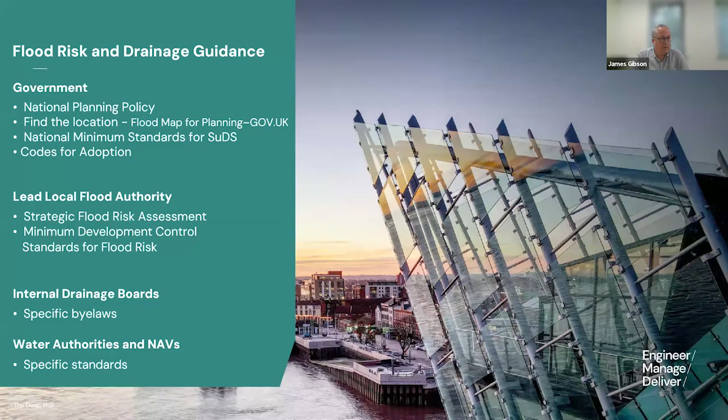We tend to apply to them for connection discussions and discharge rates. But for adoption, I'm seeing a definite swing towards NAVs. Whether that swings back towards water authorities in the future remains to be seen, but there are commercial benefits and maybe programme benefits, though overall the customer experience shouldn't change.

So, very high level assessments. On screen now are various guises of flood maps - some are old, some are new, some are available now on the government website. If you type in flood risk DEFRA, you'll get a link. You'll be asked to put in a postcode, and then you can draw around your site to get the flood risk data that's available, and there are numerous forms of this data available to anybody who types in the postcode on the website.

What governs development in flood risk terms is flood zone 1, 2 and 3. Zone 3 is split into 3A and 3B, with 3B being functional floodplain - areas designed to flood every so often, more frequently, and which really shouldn't be developed. Flood zone 1 is the lowest flood risk area, from rivers and sea, fluvial and tidal as they call it. Flood zone 1 is the area you should try to direct development towards in a sequential approach, taking the lowest risk area to develop in first.

The map in the top right-hand corner is Hull and East Riding. So when I say try to develop in flood zone 1, it would suggest Hull shouldn't be developed in, and that's not the case. There are very specific requirements for development and flood risk in Hull, but you can clearly see it follows the principle that where there's water, there's a risk.

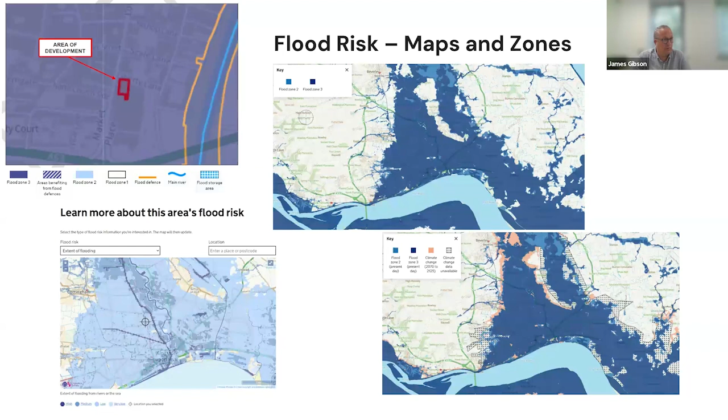Surface water flooding is that which falls out of the sky as rainfall. It's based on topography. There's a small allowance, I'm not exactly sure how it's calculated, for some drainage within the area. But if you were planning a scheme up in this northeast corner, you would try to mitigate the overland flood risk elements, either by relocating a development away from that area if you could, or by raising a finished floor or putting flood resilient measures in.

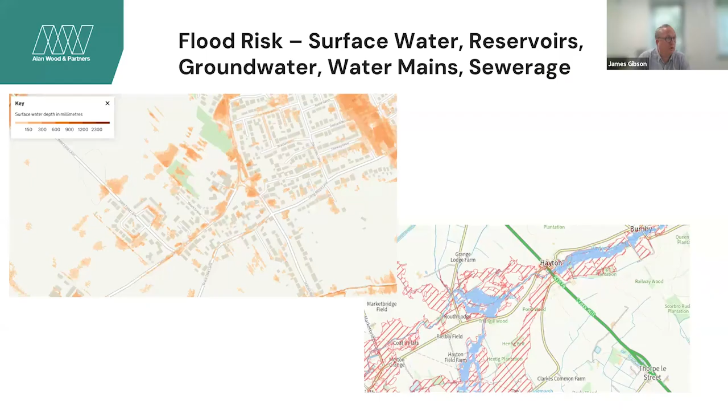This is an extract from the East Riding flood mapping service, which I think is really, really good. But you can see there are some significant depths of flooding predicted in Goole. That then governs mitigation and development in Goole. It is a low-lying area. For those who don't know, it's right next to two or three watercourses that are all at flood risk, and it's in the Humber Basin.

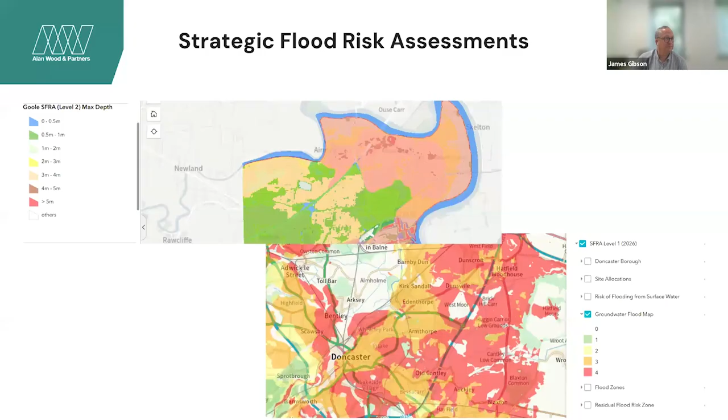So Doncaster produced their own mapping of that risk. Green is low, red is high, and that helps inform perhaps development potential, where a developer may want two stories of basement, and actually, no, that's not going to be appropriate in a particular area because groundwater flood risk is high and requires mitigation. So that's very high level site-specific information, but available to anybody to look at and interpret as they will.

As far as I know, the EA, the Environment Agency, don't publish flood level data. You have to request it. There's a variety of timescales that you get the data back from. Some sites are quick, some are less quick, but this, I think, is for York and the River Ouse.

If I can just focus on these, these are node points and watercourse. So that River Ouse has been modelled in hydraulic software. Each node has a flow associated with it at a return period, and the flood level is associated with that.

So if we've got a site in this area, we would look at the nodes opposite, we would look at the nodes in general and say, for the 2% AEP, which is the annual exceedance probability, the 1 in 50-year event, what level would that be? And we've got for that particular node 10.5 metres above ordnance datum.

If your site's at 12 metres, then clearly we're not flooding, but as that flow and flood level increases for the higher events, the 1 in 1,000 event, it's maybe up at 11.7 as it says on the table. If you're at 12, then clearly you're not at risk of flooding, and that should be reflected in the flood maps.

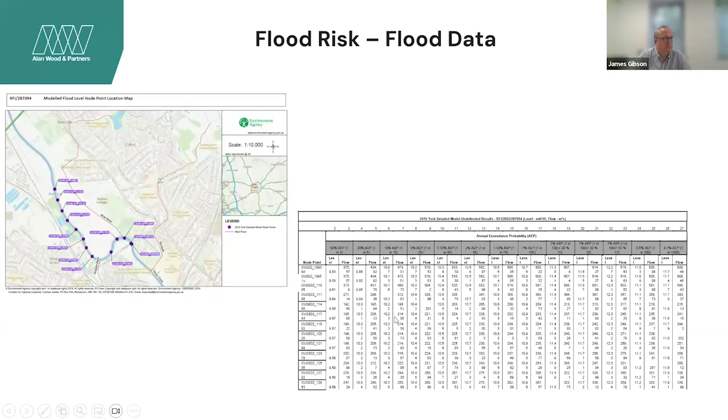Moving on to surface water drainage and drainage in general. It used to be that there were 3, expanded to 5 hierarchies of disposal. That's now been expanded in June last year with the National SuDS guidance. And in water stressed areas, which given recent weather probably most areas are, the focus is now on rainwater harvesting. Can you use that for non-potable use, irrigation primarily?

Can you use it for potable use, albeit that's more challenging than non-potable use? But we've had schemes in Hull recently that have had to consider rainwater harvesting, which we've not really considered historically.

So that's a primary requirement, and to provide good reasons why we can't do it on sites.

The image to the bottom right is a SuDS planter that doesn't recycle flow for non-potable use, but it does slow the flow down. That's a planter that has got medium within its soils and gravel, so we're getting water quality benefits. We're getting slowing the flow, and we can also reduce the volume of water discharged out into the sewer system. There'll be an overflow from that device into the ACO down there.

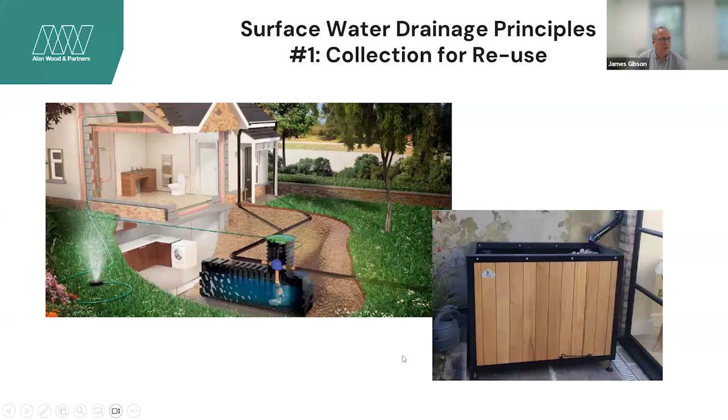So then we get back to what I think is probably well known by the audience, the infiltration drainage principles. Soakaways, historically, used to be brick-filled pits. Nowadays, they're a little bit more complex and cleaner than that, whether it's a geocellular system, a manhole, or a granular surround. Getting water to go back into the ground is more sustainable than discharging it elsewhere.

We're very much guided by BRE 365. So anybody who has a consultant keeps on getting battered by 'you need to do a BRE test', that's the reason - Building Research Establishment test number 365. It's as dull as it looks in terms of digging a hole, filling it with water and timing it. In my experience of watching a lot of these, a lot of them don't work, and I've had occasions where water levels have increased, not decreased.

So the areas that we tend to work in the north aren't great. However, we do have schemes where we have limestone ground conditions and infiltration works really, really well. This tends to be a discussion point during the LLFA meetings - do we need to do one in Hull when we tend to know the ground conditions in Hull aren't great, but there are pockets in Hull that may be appropriate. So this is the reason why we specify BRE 365 tests.

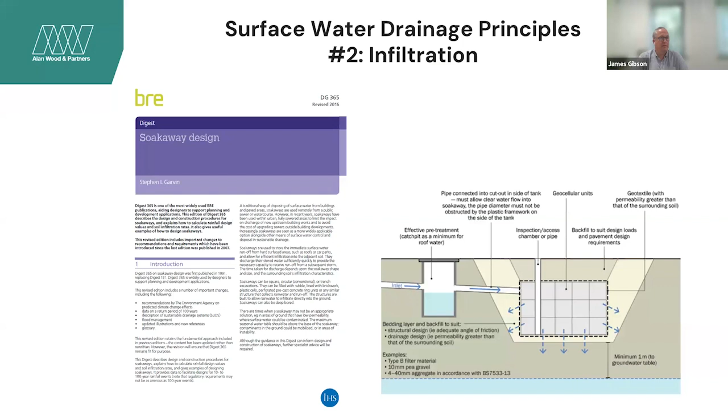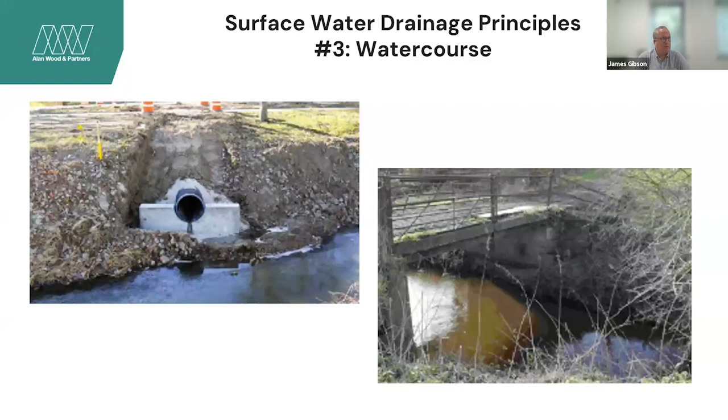In recent standards, foul water sewer discharge was accepted - that's been, I think, removed. There are issues with foul water sewers, obviously, which I'll touch on later, but the hierarchy should be to reuse it, to get it back into the ground, or to discharge it to a watercourse, and these last two, number 4 and 5, are less favoured.

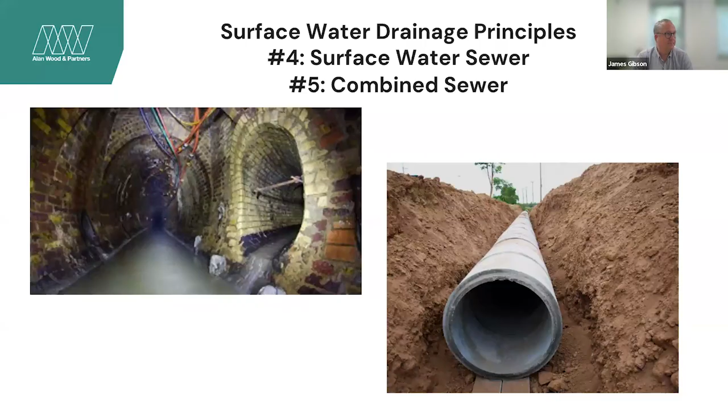So the guidance that we primarily use is the SuDS manual. It is a fairly old document now, and I understand it is being renewed. I'm sitting on a SuDS panel with CIRIA and local partners on a SuDS tool, IQ SuDS, which will develop and enable quicker assessments on the benefits of SuDS for consultees, contractors, consultants, and general public. So the SuDS manual is the element that governs our designs and outputs and informs development in general from a drainage perspective.

The other 3 elements of SuDS, the biodiversity, the amenity, and water quality, have always played second fiddle, but I think that is certainly changing now. The biodiversity certainly is being considered more hand in glove with the biodiversity net gain requirements. Amenity is at the forefront of developments and residential schemes, making it an environment people want to be walking around and interacting with. And then quality,

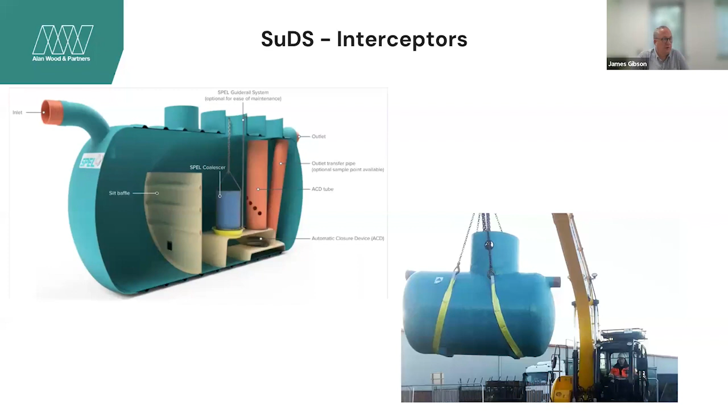These are still appropriate. There are settings in more of an industrial commercial sense that these are appropriate still. They can still provide water quality benefits. They have a finite lifetime. They need operation and maintenance, but people are used to seeing these and it's still appropriate.

However, we're more used to getting these discussion points on schemes, bioretention areas. Flow comes off the carriageway and is filtered through what is effectively a planted up area. For anybody who's been to York recently, in the York teardrop site at the back of the station, the roads run off to really some good SuDS around there.

The York Ring Road, again, there's some wildflower planting and some swales that deal with runoff from the road, and that's quite a high risk area, massive, huge traffic movements, huge amounts of vehicular movements in the day, and the risks therefore of pollution are quite high. These aren't designed to manage 100-year storms and big events. These deal with the day-to-day 1-year events that carry the highest pollution.

What you don't have a lot of is the water quantity. So you're not storing a lot of water. You might only store 2 inches, 50 mil of water in the bioretention. So it's land hungry from a developer perspective, but actually you could incorporate that with traffic calming. And it's got an overflow into the sewer system to deal with the larger events.

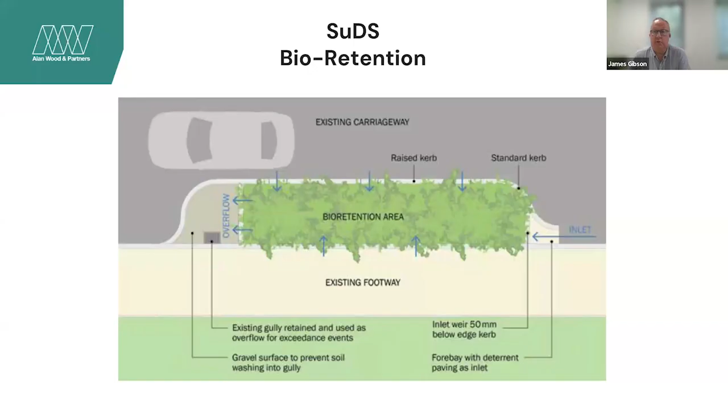Anybody who's driven down the motorway with French drainage on the side of it, this is very similar, or exactly the same, different way of saying a French drain. It's a filter trench with a granular layer that water can flow off the surface of the carriageway or the hard standing, the car park, wherever, through the granular material.

It isn't particularly nice to look at. However, you do get the water quantity benefits. There tends to be a 30% void ratio in the stone, so flows can be stored in the filter trench. They're certainly treated by the granular material. But in terms of benefiting amenity and biodiversity, it's a bit of a stretch.

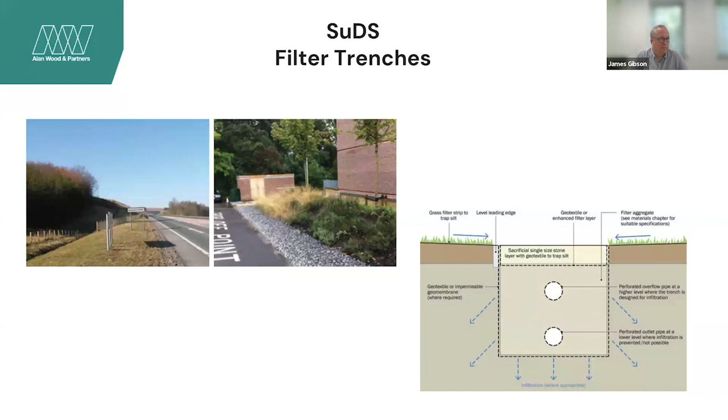But clearly that's taken away 15 meters of potential developable land. So planning developments, densities may need to be tweaked if large scale SuDS like this are required.

There's many ways to address groundwater issues, in terms of whether there's a risk of groundwater coming up through the base. We can line the swales with impermeable membranes. If the swales themselves are very shallow, we can underdrain them with perforated pipes. So swales are, I think, quite beneficial.

And in Lincolnshire, for example, these are fairly commonplace. Certainly as you head more south in the country, swales are probably more seen with highway authorities and accepted. As we move up further north, they're being encouraged, but in terms of design standards and expectations, we continue to work with local highway authorities on the adoption requirements, and again, each authority has a nuanced view of it.

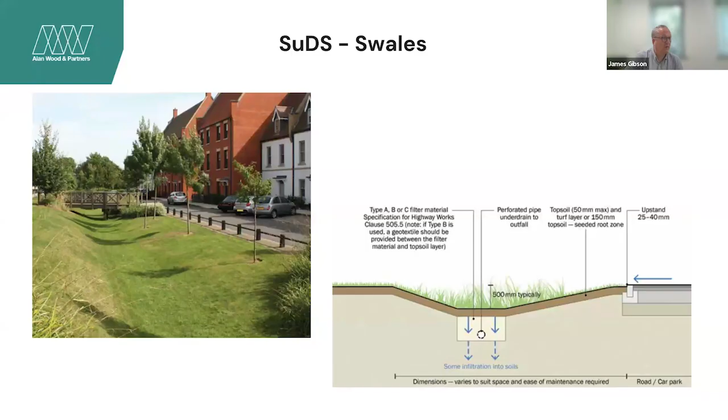We limit the flow back into the combined sewer at 2 points. So this was a flood risk reduction scheme, but with a very clear objective to try and include more green SuDS. In this case, greenery wasn't appropriate. The loss of car parking space was very, very sensitive. So to put in bioretention areas or tree pits, in the end of the day, wasn't agreed.

However, we are getting water quality benefits. We are slowing the flow. We are storing excess flows. So from a flood risk reduction perspective, this is doing the primary job.

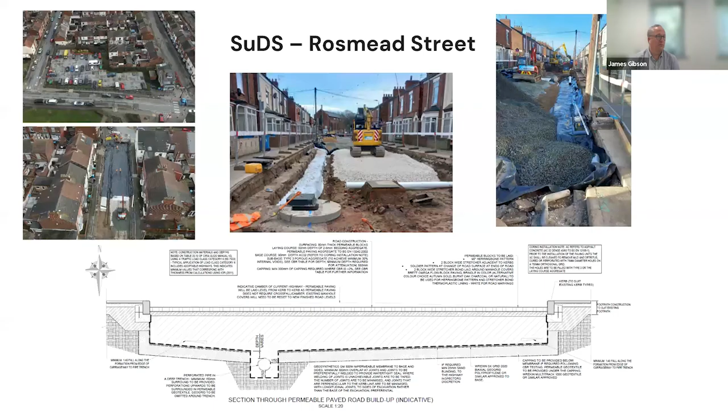Again, an involved scheme with Hull City Council and their highway teams, who were really receptive and up for the challenge - just in terms of material replacement, what do you need in the depots compared to how you used to do road construction and maintenance? But that, for me, I think is a success in terms of flood risk reduction, and it's a matter of opinion, but I think it looks a bit nicer than the tarmac.

I think people are used to seeing large attenuation basins on schemes, and they are bang for buck, very economical compared to buried storage. However, they are end of pipe solutions. Flow tends to go all the way to the basin. You get your water quality benefits if it's planted.

You get more water quality benefits if it's a pond. You get the biodiversity and amenity benefits. The more planting and more elements, you make that look less engineered. However, it may prevent adoption if you put in too much planting and amenity space. So there's a trade-off between what a water authority or a NAV may adopt compared to what the biodiversity net gain requirements are.

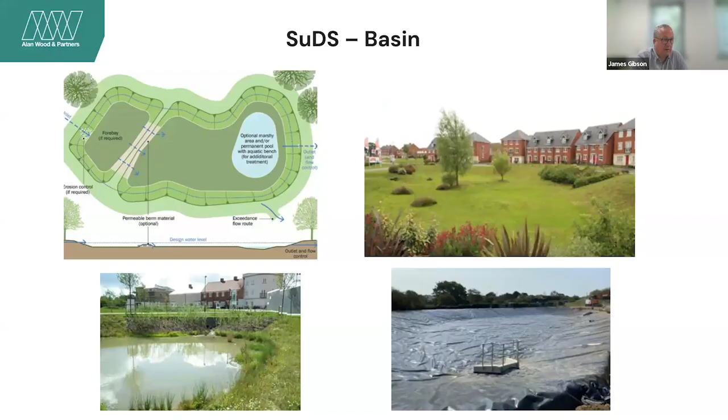And again, bottom right-hand corner, there's always methods to prevent groundwater ingress to make sure that the capacity of the basin is there. You can turn the basin into a pond and have a permanent water level in it.

Image on the right-hand side is directly from the SuDS manual. We spent an inordinate amount of time talking to specialists about gradients and depths of water for water quality benefits. However, that's got to be traded off by over-excavation and the cost of disposing of material, because the void that you create to create the pond isn't available to be storing water. So it's not a quantity benefit, it's purely a quality and amenity benefit.

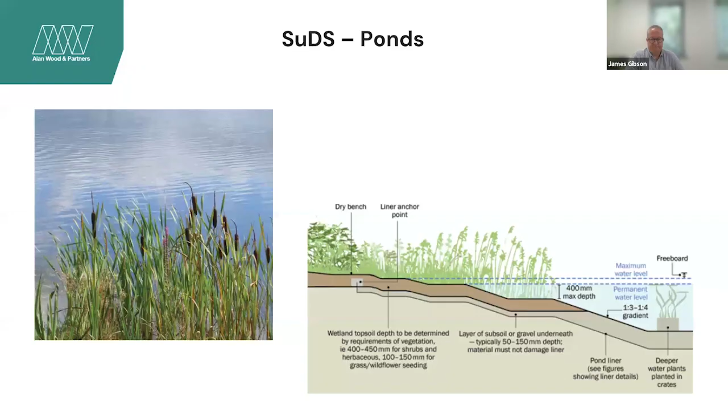Moving towards one of my last slides on surface water, the buried storage is traditional geocellular crates, the milk crate type people see, whether wrapped in a permeable membrane or not. We've got oversized pipes, precast concrete tanks. They're traditional, I like them - you know what you're getting when you put them in, and they're historically proven, certainly the concrete tanks. However, absolutely no water quality benefits - sorry, there are some, because silt can settle out, but there's no biodiversity, no amenity, and local authorities in my experience are moving away from them. However, they are still part of the SuDS schemes you can use.

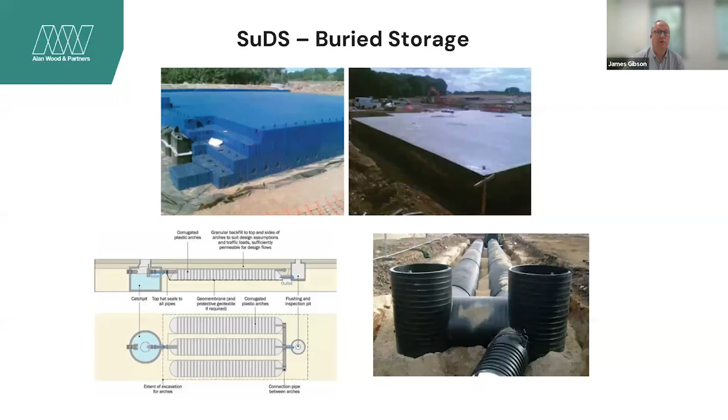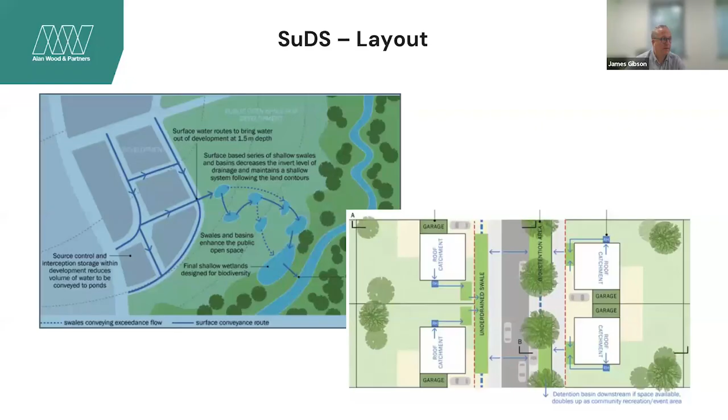Layouts, as I touched on before, SuDS tend to be more land hungry than clearly a pipe and a manhole in the road. That's just down to space use, topography, available areas, and what you can try and double up on. Permeable paving in driveways, for example, you're not increasing the space requirements but you may change the material. You can still use permeable tarmac on lightly loaded areas. So it's not all doom and gloom from a space perspective - it's just got to be appropriate to what you're trying to achieve.

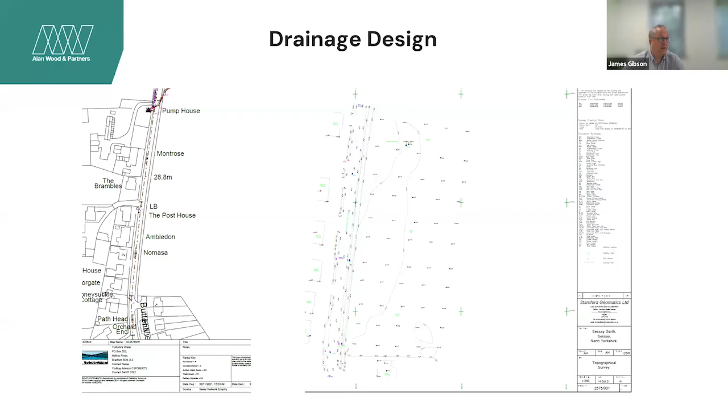I won't go into too much detail on drainage design itself, but our starting point on the right hand side is a very light touch topographic survey - where does the land fall to? Left hand side is an extract from Yorkshire Water sewer. Where can we discharge into if we can't infiltrate, if we can't connect to a water course, if we can't reuse water on site? So we take those elements, look at the ground conditions, look at the connection points, and then build up a scheme.

This is for a small house developer, where we maximised the use of permeable paving. If I'm being honest, this is a couple of years old - I don't think we made the most of SuDS planters, for example, or bioretention areas. So there are always opportunities to add more, but there's the balance between programme, cost, and developer ambition, as well as local authority requirements. In this case it was deemed appropriate that permeable paving was used to slow the flow, balance excess flow, and get the water quality benefits.

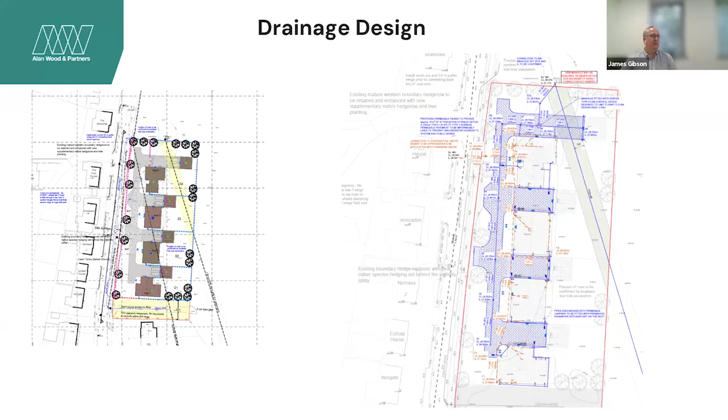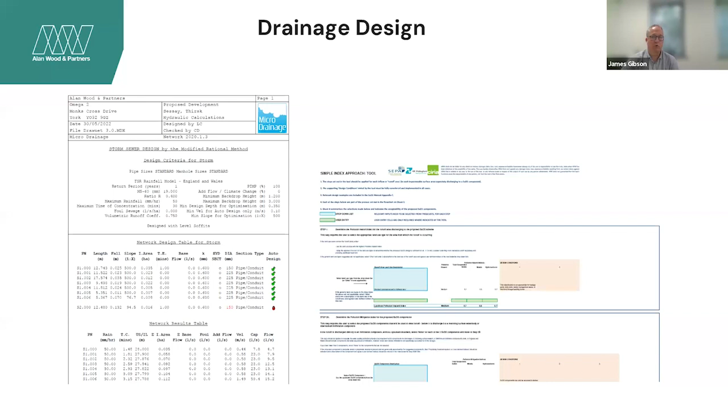In terms of developing that design to how it looked from the previous slide, we used Micro Drainage, now InfoDrainage, to do the hydraulics. The tables on the right hand side are the water quality indices we use to demonstrate that water quality has been improved by the SuDS used. A typical surface - a roof, a hard standing area, car park - will have a certain set of indices. If you put in one kind of SuDS, you will reduce those indices, and it passes or fails. It's a fairly simple tool - there are more complex tools, but I think that's an appropriate way of assessing water quality benefits. The more SuDS you put in, clearly the cleaner the water you'll discharge.

Touching on adoption - not all sites are adoptable, but we do a lot of Section 104, which is sewer adoption under the Water Industry Act, governed by codes for adoption and Yorkshire Water specific nuances if you're in that area. But new assets and variations have their own requirements too - they may accept a deeper depth of water in a basin, there may be less inspection fees to pay, or acceptance of a NAV may be more advantageous compared to Yorkshire Water, and vice versa, as I said at the start. So these are the documents, and through experience, one officer's or engineer's interpretation of these is potentially different to others. So getting to know people and the way they view and work is just as important as the documentation and guidance itself.

So summarising that whistle-stop tour of what SuDS can do: it does reduce flood risk, and it can absolutely enhance water quality. The majority of SuDS, other than the bioretention I mentioned, has a quantity benefit of reducing or providing storage to balance excess flows. We could certainly use green SuDS to enhance biodiversity, dovetailing with BNG requirements, and amenity goes without saying. The constraints definitely are space.

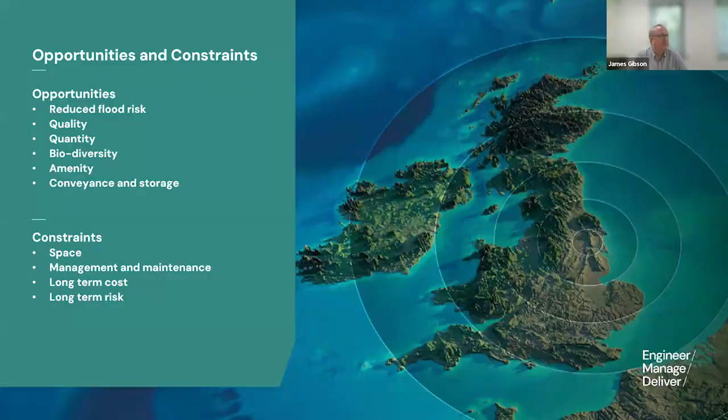My last thought before I stop is foul water drainage, which I wasn't going to drop into the slides, but actually a lot of our schemes at the moment are coming under scrutiny from capacity of the foul system. Treatment works are at capacity, or a lot of them are. We're seeing schemes being limited in terms of their development, maybe not starting until 2030 because of the next AMP period - AMP stands for Asset Management Plan Period 8. Yorkshire Water and the water authorities do that every 5 years to provide capacity, and it may be a limiting factor. You might tick off, I've got no flood risk, I've got manageable flood risk, I've got a manageable surface water scheme, and then you're stymied by foul capacity you don't really see coming. So whilst it's not a planning requirement for foul, we always recommend that you get a pre-planning inquiry response and make sure there is capacity there.

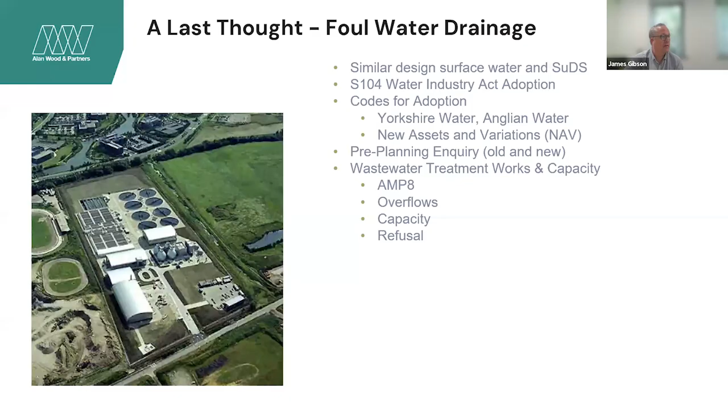You can't reserve it, but you can plan for it. That is something that is catching larger schemes out, but also smaller schemes as well, and cumulative impacts over the years have impacted on the ability for the water authority to treat the water. So that is it from me.